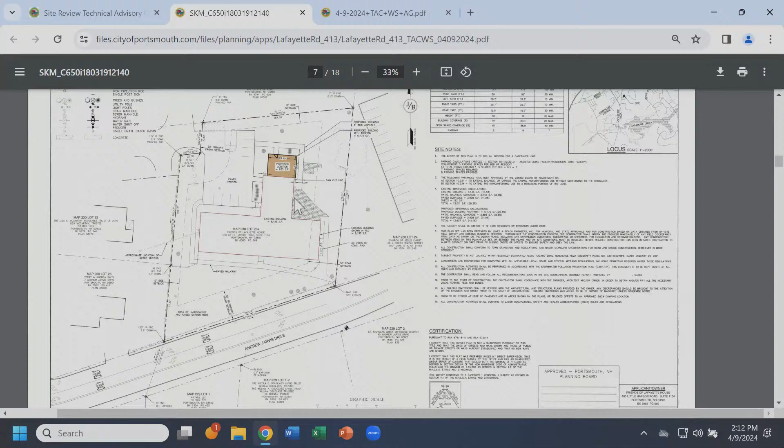We can check this afternoon, Joe, to see what we have. That'd be great. We'd at least know, I guess we'll file for that TAC either way, but then we'll know if we're calling it an amended site plan or if there wasn't one, somehow magically no site plan, then this is a first site plan. Right, and then it would be all waivers. If you can just let me know what to do if you find it, if it's amended, if I'd have to file waivers, or if we come in under some other level, that'd be fine.

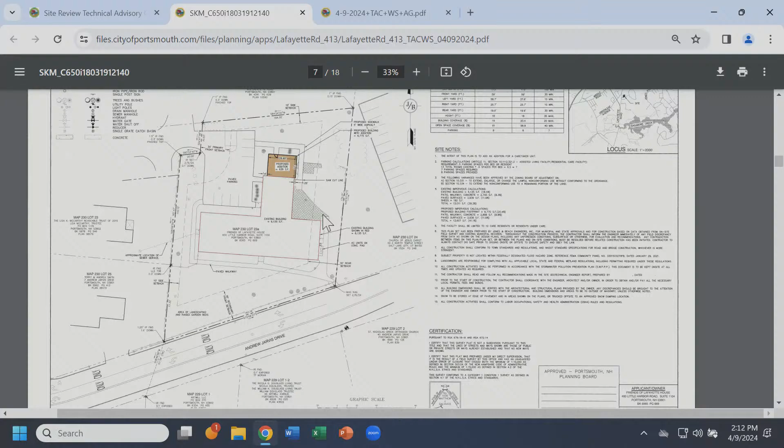Any other concerns or questions? This is for me? It is. Oh, it is? Yeah, it's the existing building sprinkler. Oh, right, sure. I mean, I don't know the answer to that, but I would assume. I'm 99% sure it is, and if it's not, it will be if you do an addition. But I'm pretty sure it already is. It was built as a housing, as like, I saw it somewhere.

The caretaker lives there all the time. And then on weekends they supposedly have weekends off, but they don't actually have another place to go. So then they have a weekend caretaker that comes in on the weekends and covers everything. But the 5-day-a-week caretaker and the weekend caretaker literally stay in the same apartment for the weekend, which is quite tight and a little awkward. They're afraid they may not find any other human beings willing to live like that if the current caretakers ever retire, and they're in their 60s. I can't really blame them, I don't think many people would volunteer to live like that. So this is to really just give them a spot to be.

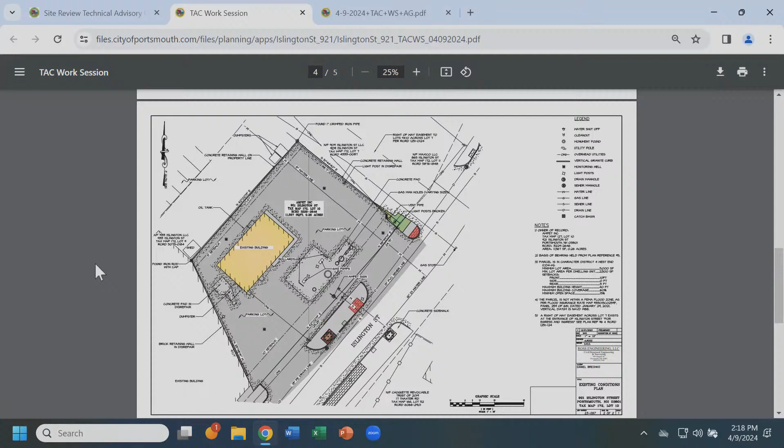One key to my vision for the site is to provide parking that comes in off the driveway to the top right in this plan. There's an existing easement that allows parking to come in off that driveway to my property, and then take the building footprint that's there now and expand it to add the market space.

Since the current service garage uses some of the space behind where the market would be for an air compressor and other storage, I'd expand the service station to the left to add room for a small office and also have storage there for the air compressor utility.

I've got all the green lines there to show what parking I feel is available on the site. It does fall short of the requirement, which I think is unfortunately pretty standard for Portsmouth, so I'm looking for a conditional use permit on that.

I have reviewed this with Peter a few times, just kind of what my thoughts and plans are on this, and I think we need to get an extension of the special exception because the gas station is not allowed in the character district, CD4-W. So I'm looking to extend that.

Also, right now there is some contaminated soil underneath this lot from an underground storage tank that was removed years ago. Right now the full site is 100% impervious, and I'm a little nervous about making a permeable surface there to get that 15% open area requirement, where we're disrupting the groundwater supply.

This site has been monitored—I forget the exact site—it's on the state's website for easily 10 or 20 years or so, just monitoring the groundwater migration. Nothing is moving underneath the site, it's all well-contained contamination. So I'd like to ask for, would it be a variance on the open space? Yeah, if you can't meet it. So, variance on the open space.

So there'd be a wall here, correct - a lower wall in front of the parking space? Yep, retaining wall at the front of the parking space.

So the cars coming in, have you looked at the turning radiuses for this site? I wanted to have this conversation first. I did look at some aerial shots - they show it's a very wide driveway cut that's there today. Yeah, I think much wider than it needs to be.

I've looked at a lot of gas stations as I drive around different areas. So I'll check the radiuses - maybe I lose that first spot on the north side. On the south side, there are some aerial shots on Google Maps that do show 4 cars parked in that spot along the property to the south.

Well, in the first spot, you have to go through an island. Are you going to remove the island? No. Is that your island to remove? No. So the setback - most of that's in the setback, right? That there, yeah. So that retaining wall, is that part of my site retaining wall? I believe so, yep.

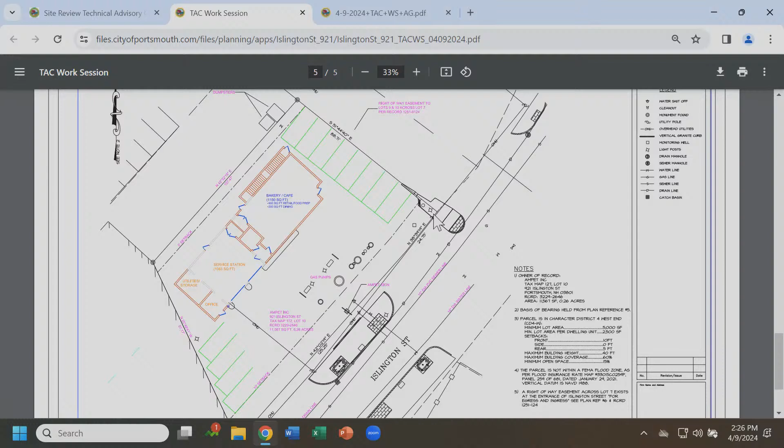Because it looks like it's off your property too, part of it. Yeah, just something to look at, see where that... Yeah, for sure, because that looks like it's someone else's. I'm sure I'm looking at this wrong.

So those green spaces, are those parking spaces? Correct. How are you supposed to park? Oh, you come in from the other side? Yeah, there's a driveway. Okay, there you go. So in their deed, I guess, whatever it is, right? I have deeded access for a driveway off that whole side already. It's a note in that existing conditions drawing.

You'll definitely need some physical protection to that egress stair on the first page - a bollard or cement. I would think right now there's a parking space right in front of it. Oh sure, I'll have to set that back a little bit. I can slide that back, yep. Right, that makes sense.

And then you'll call out your accessible spaces - a van wheelchair accessible, handicap spaces. For sure. Yep.

You'll probably need a grease trap, right? A 1,000-gallon exterior grease trap. Probably, for the volume of production, I think we could get by without it based on sink capacity. So it's 1,000-gallon unless you get a waiver. So you may get a waiver - it's 1,000 gallons for construction. Got it, 1,000 gallon for new construction, okay.

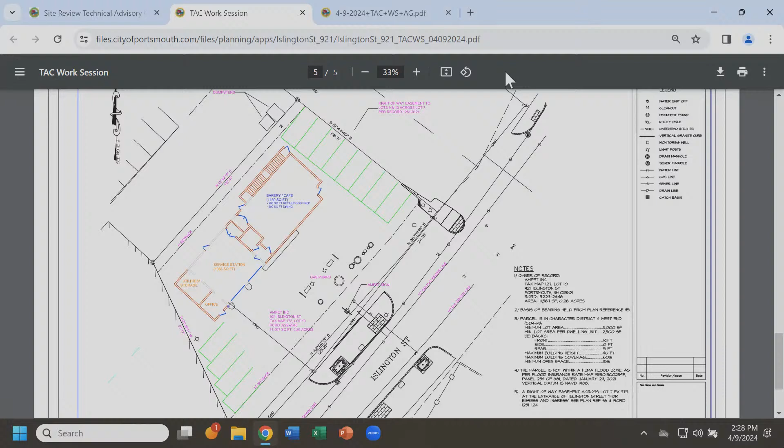So, do you know where the gas fuel tanks are? Yeah, I think if you scroll up to the site plan drawing, it's there. It's just toward the street from the gas pumps in the northeast.

So you see the gas pumps and all the circular caps there - those are the manholes for the underground storage tank. Where? Right next to the pumps, yep. But where are the tanks? Where's the underground tank? It's centered underneath those manholes. So all those circles are manholes to access the underground tank. How many tanks are there? One tank.

So does it go underneath where the fueling station is and the whole site there? Who's got the arrow to point? Peter does. Can I step over and grab your computer and outline yours? Should have brought a laser pointer, right? Oh, there's one right here, right behind that computer.

It works. All right, pop that over here. Point. So this underground storage tank - the center line of it is underneath these holes right here.

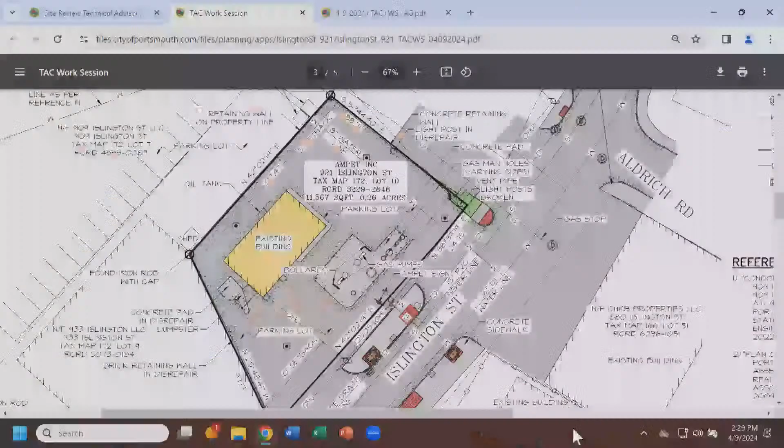All right, so I got an email from the traffic engineer - ideally we want parking spaces to start no closer than 50 feet from Islington Street.

Which is probably not gonna happen. Yeah, so 50 feet - that's his comment, so I'm just saying it out loud.

For sure, okay. Beyond that, because the use is changing, we're gonna require you to change your sewer lateral, which looks like it goes underneath your gas tank. And the water line has been changed in the city street, but that goes underneath the gas tank too, maybe?

And then, I don't know about fire suppression, whether that's gonna be needed or not, but we talked about that already. Islington Street's brand new, so there's gonna be an impact fee to dig in the street. So the city's gonna defend it with its life.

So when they say new sewer lateral, a new sewer line was put underneath the street, and they put a T out to tap into, to connect to the existing service? There's a new sewer pipe underneath the city street. Yes, but the existing line on the property did not get changed. It's likely too small to support the uses that you're asking for. Okay.

So it's likely going to require you to pull the gas tank out so you can change the utilities. I'm wondering whether it's worth it to maintain a fuel station there. I'll look into that, I believe they're probably to the south of the fuel tank. I don't think I'd have to excavate under the fuel tank to get to those, because the fuel tank itself is probably 10 feet deep or so, and I don't know about the sewer line with it. Probably fine, but I'll definitely look into that.

So I take it there's no landscaping on this, it's all completely covered pavement? Correct, yep. I don't know if there's a requirement - I didn't look at landscaping. It's completely covered. No requirement? No community space, there's the open space requirement. 50%? Yeah, open space. I don't know if there's any landscaping.

So for landscaping, my goal was to put a planter kind of in this corner here, and then a planter also in the other corner over here, to kind of dress up this area, and then something along the front here also.

Will people be able to get out of those spaces if there's somebody at the gas pump, or on the office side, or the service station side? Yeah, there's enough physical room for that. I think it'd be helpful to show the vehicle in there with all the turning radiuses, and your gas truck when it comes in to fill up those tanks, they can get in there. My question would be about all those spaces that are staggered, right?

When they leave, they gotta back out, and then they can pull out here. But then you get other folks trying to come in, and it seems almost impossible to make that turn. It almost seems like that should be one way, exit only. This is maybe not on the same - on paper it doesn't do it justice, but I couldn't imagine someone trying to leave and come in at the same time. It'd be a very hard right turn to avoid any parked vehicles, let alone a vehicle that was trying to exit.

So with the turning radiuses, I could essentially make it one way - set those entry and exit points so you enter this way, exit that way. Yeah, you should show that. You'd exit in the lower area, yeah, exit down here, making it a one-way. So you get into the space, but getting out of the space, you got to wait till someone's done pumping, or do you have enough room? Or coming out of the store, that one space, it looks like you could hit the front door of the store almost.

I'd label these first 4 spots here residents only, just because it occurred to me that with strictly the employees working, you could fill it up. And then cars being inspected, you might have 6 cars there.

And that's my point - when I go to a convenience store, I'm not sure if it's legal to leave my car at the pump. I know it irritates me when I'm waiting to get gas, but I'll just pull in, put my car at the pump, buy something in the store, and come out. So I'm anticipating a fair amount of traffic, and also a fair amount of foot traffic.

You've got all the apartments behind this, you've got some houses pretty close across the street. I think if somebody's going to hop in the car and drive somewhere, they've got Hannaford's down the road. I'm anticipating more foot traffic, and then people at the pump or shopping at the store.

Right now it's a 1-person garage, so there's not a tremendous amount of cars. He's just not churning people through there because it's a small operation. And then there's also 7 on-street parking spaces down here in front of the Alpha Graphics.

Do you anticipate having vehicles in queue where the owners aren't there - they dropped them off and they're waiting to be worked on? Correct, it could be. That would make sense that those spots are right there for the garage only. This is the garage only, these are residents only, and these 3 here are for the market, 3 or 4.

So you've got 3 for the market, and then you have 1 space on either side of the pumps, which is for fueling basically, plus off-street parking of course. Right now a lot of times when I drive by, he's usually got maybe 3 cars sitting on the premises, and in the garage bay as well.

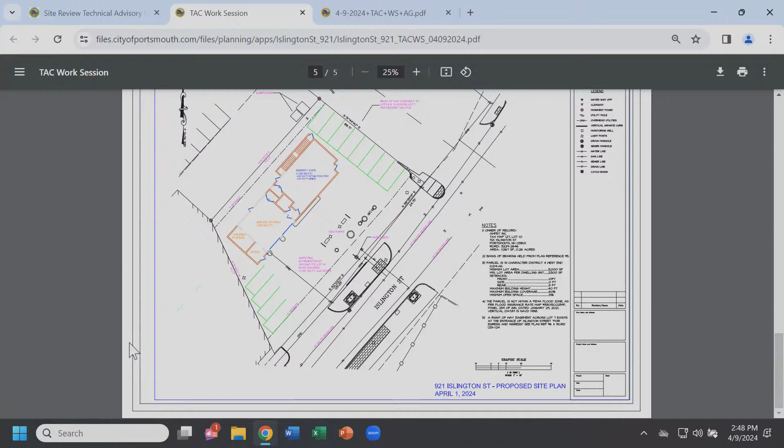Have you considered where you're going to put snow storage? Yeah, how does that work here? Does it normally take up a parking spot? Depends on how you do it. Where I worked before, they had a heated truck that would pull in, dump all the snow in the back, and run it out to the storm drain. I have no idea if that's a service you get or how much it costs. They'd have the heated truck in the parking lot with a Bobcat plowing it in, dump it in the truck, and just wait for it to run.

Probably they'd just remove it, most people remove it. Where does it go to? Wherever they can hire some private space, or hire a snow removal company to remove the snow. Then it's up to them where they put it, maybe a farm somewhere they pile it, or a wetland they dump it in, or just push it into the river. Well, better than Islington I guess.

So that's something I have to demonstrate, right? I think I saw it in the site plan. It should be shown on your plan where they're going to push the snow and how they're going to get it off site, a note that it's going to be removed from site. It's a pretty small lot. I think with global warming that's probably something I'll only have to worry about for 2 or 3 more years, right? Hard to say.

Okay, well, I'm just going to go out on a limb here and say it looks like you've got a little too much going on the site. This is a work session, we're just trying to be honest with you. It might be nice, thinking about a use, you might want to reduce or remove.